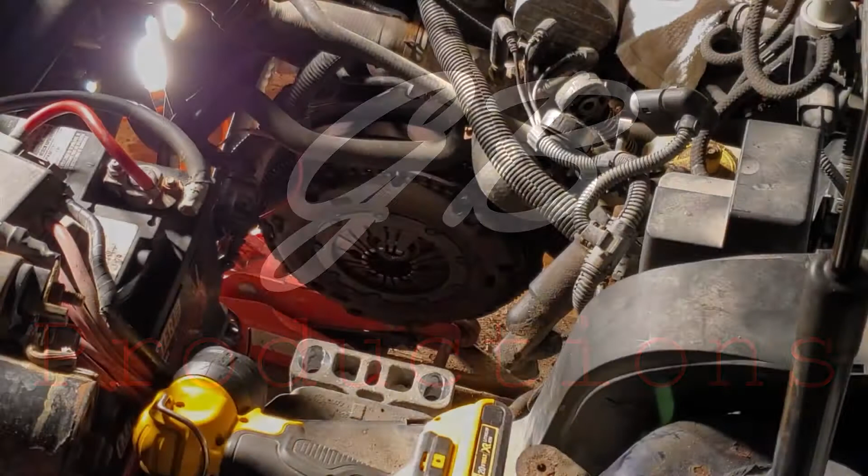Alright, so I think we are finally ready to try and fight this thing back in there. I greased the input shaft spline like the book says, and I put a little bit on the sliding surface of the release bearing as well.

So I've got a shop towel in the open passenger side output shaft flange because we can't put the actual drive flange back in until the transmission is back in the car. I think everything should be ready to go for us here.

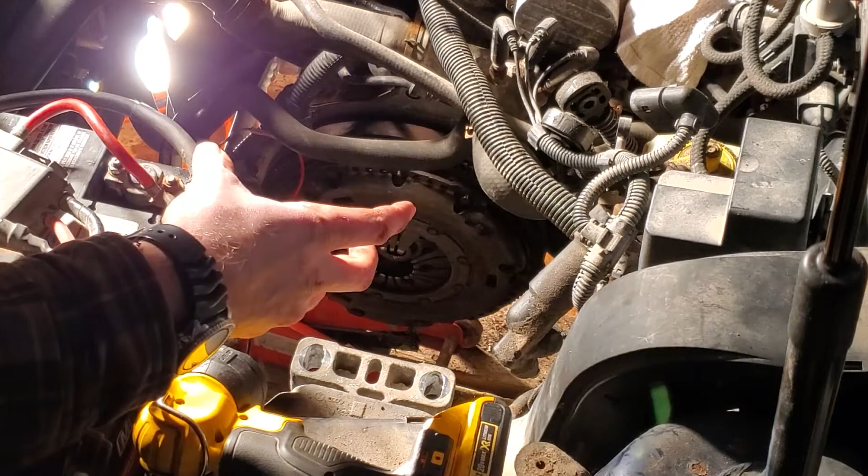According to my Euro shop guy, the reason I had trouble getting it out is because the transmission actually has to rotate back in the car, back and then up, and then rotate to get the differential past the flywheel and the subframe. He suggested having the engine as low as we can without pulling on any hoses, so that's what I'm going to do.

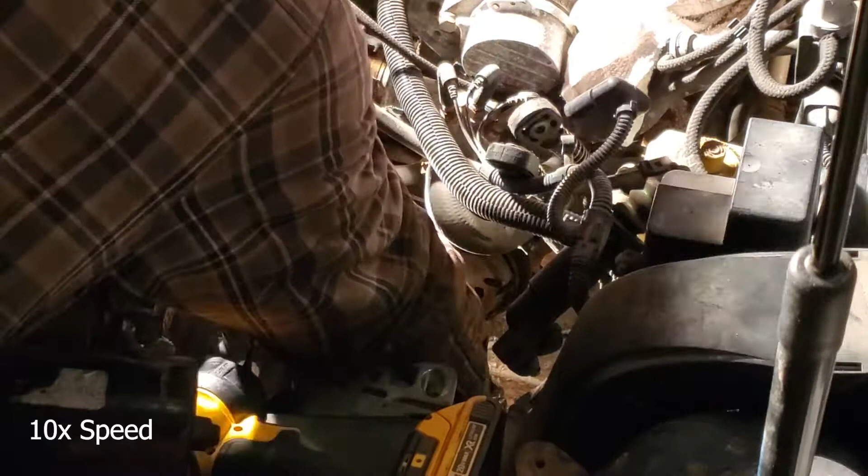Up in there as it falls off the jack, of course.

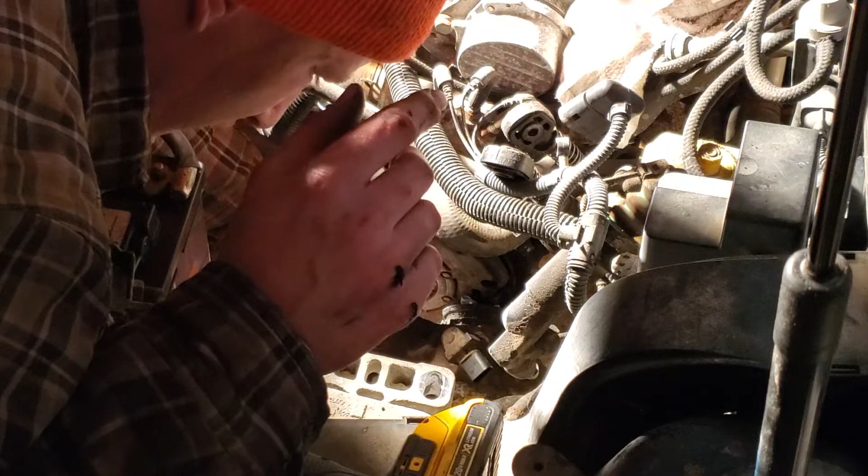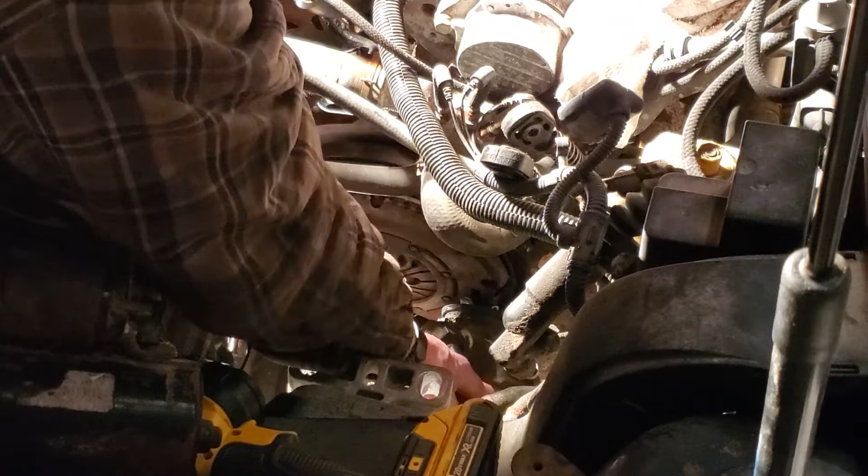Don't do that. Manhandle the transmission in? Why not? It's not gonna freaking stay there either. Maybe. Stay there for a minute. Probably not.

I know you guys can't see much, but there really isn't much to see right now except me struggling. But you should be able to see as it comes up through the hole there. Hopefully it's going to start to go here now.

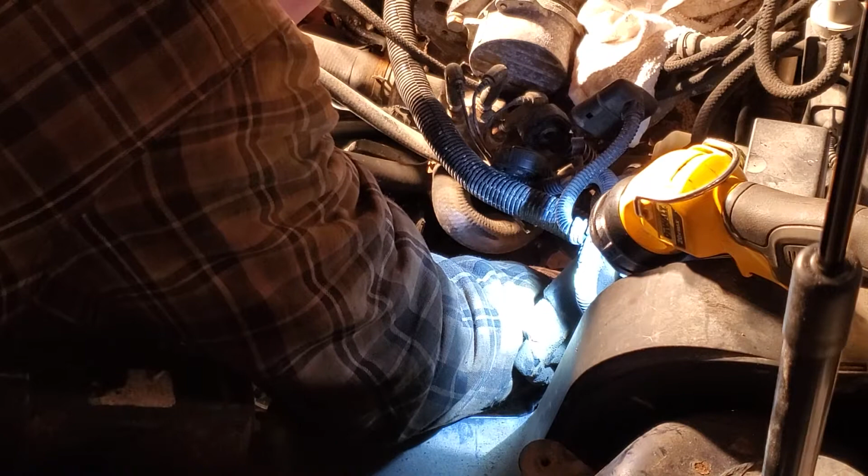I think we are in, more or less. Oh, aside from the power steering line being wedged up in there now. Probably going to cause a problem. I don't know if it fits past there once the transmission's in, so I'll probably figure that out.

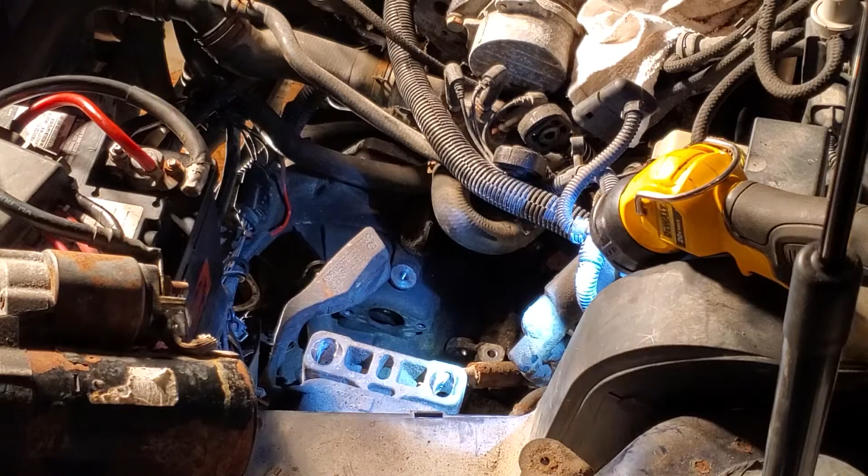Anyway, let's get the transmission closer to the engine now. I can do that without dumping it off.

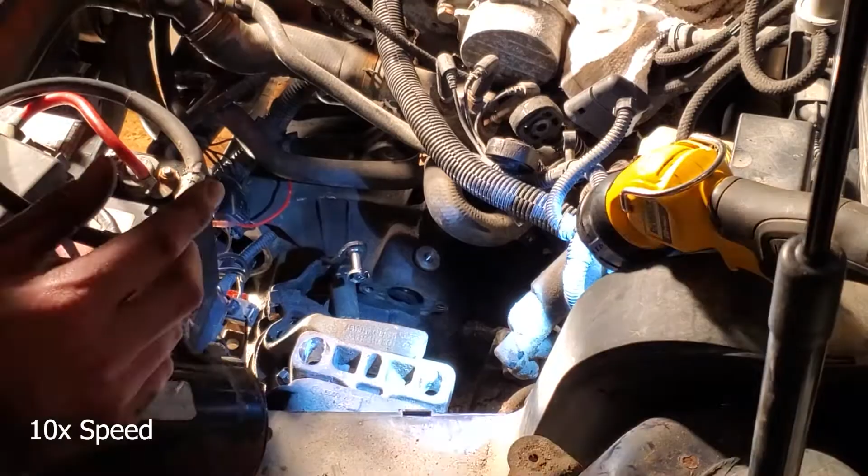Well, that's one bolt started. Man, what a mess. I think we got it. Finally.

Let's see if we can tighten those guys in gently and hopefully the rest of it moves with it. Can't remember what size they are. Get off me. This is supposed to be way up here.

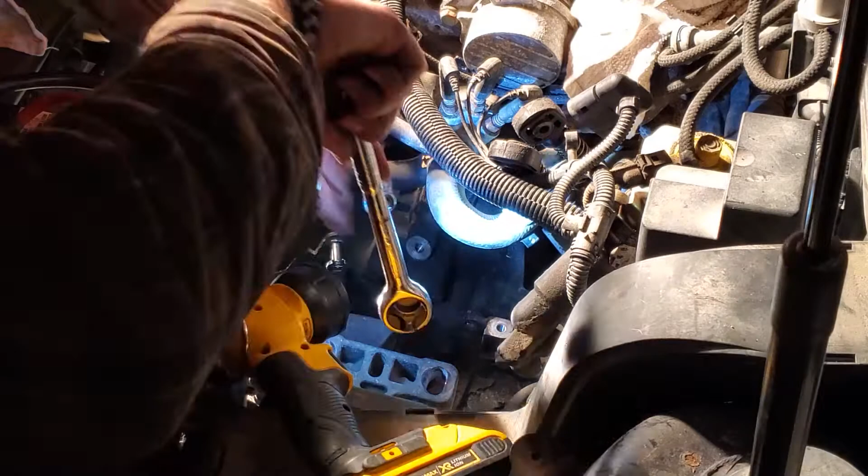Pain in the butt. Should be able to. Jack should be doing basically nothing now.

Don't do that. All right.

Okay, so it's in. Hopefully everything on the spline end of things is good. I don't think it would have gone together if it wasn't. If the spline pushes the clutch disc off center at all, there's no other hole big enough for it to go through, so I would say we're good on that front.

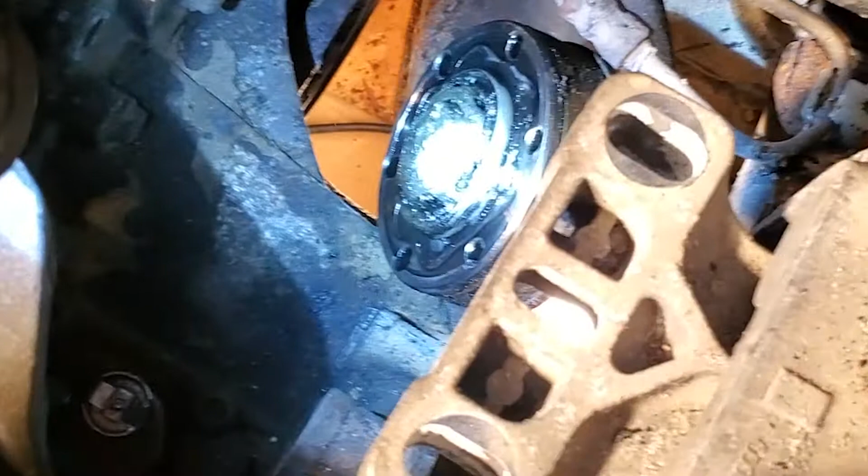So I'm just about to put together the driver's side CV axle here. The reason I'm doing this one now before I've got the rest of the transmission mounts completed is because the gasket that's supposed to be around the joint there that mates to the flange surface was missing. It's broken up inside when I took it apart. So what I'm going to do is I've cleaned the surfaces with a little bit of brake clean on a rag, and I'm just going to put a small bead of the black RTV around there as I put it together. I'm going to do that now as opposed to once the transmission is up in place, because I won't be able to access this flange like I have it right now.

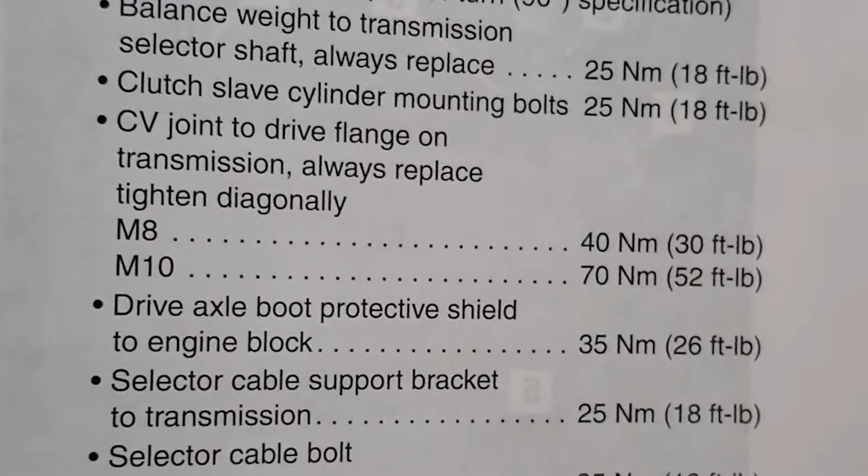And just while we're here, I figured I'd give you the torque spec for these CV axle bolts. They're M8 diameter on the shaft, on the threads, and for M8 it's 30 foot-pounds, and for M10, if we look at the book here, M8 are 30 foot-pounds and M10 are 52 foot-pounds. So I just took an 8mm wrench and put it around the shaft of the axle flange bolts, and the ones I have are M8.

So I'm going to do those to 30 foot-pounds after I put a bead of RTV on there, and then carry on with getting the transmission remounted, torque up the bellhousing bolts, get the mounts back on, and then I can do the passenger side CV axle as well.

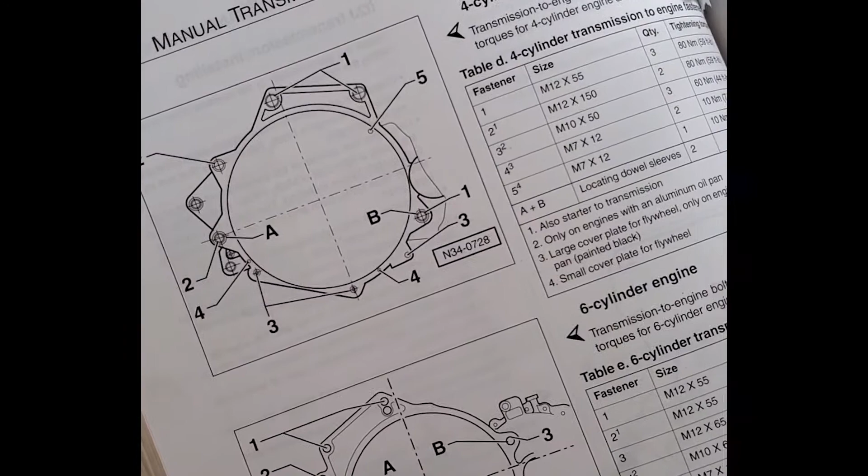So I'm ready to torque up the transmission to engine bolts now, and so we're looking at the 02J transmission. And of course, because they decided to do not only different sizes of bolts but into different materials, we have like 6 different torque values we have to do here, which just makes it more complicated than it needs to be. But anyway, I'm going to leave the starter ones out for now.

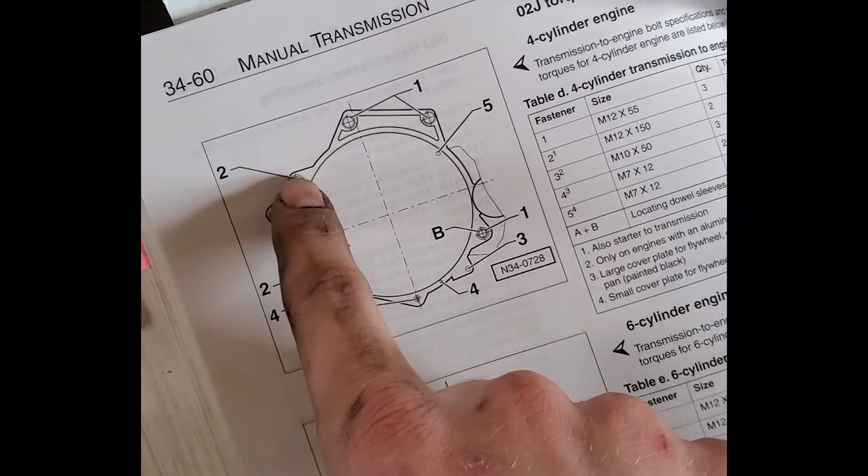That's the 2 number 2s on this side, because I'm not putting the starter in yet. I've got the 2 number 1s in the top in, I've got the 3 number 3s in the bottom in, and I've got the 1 additional number 1 towards the back of the block in as well.

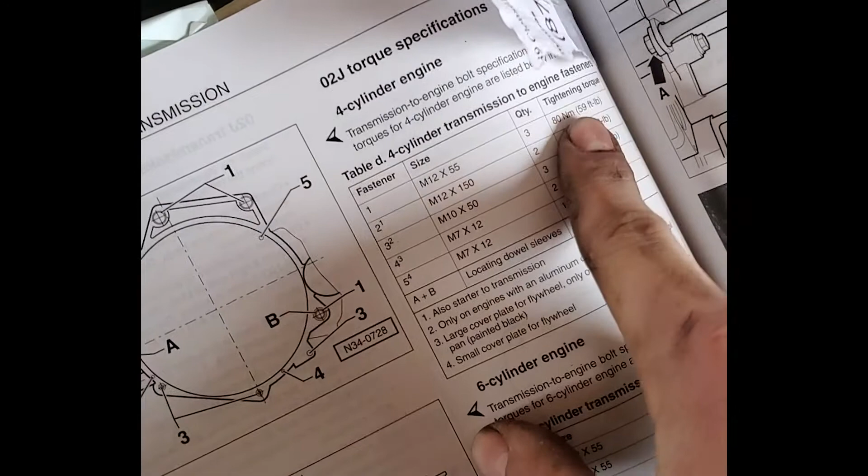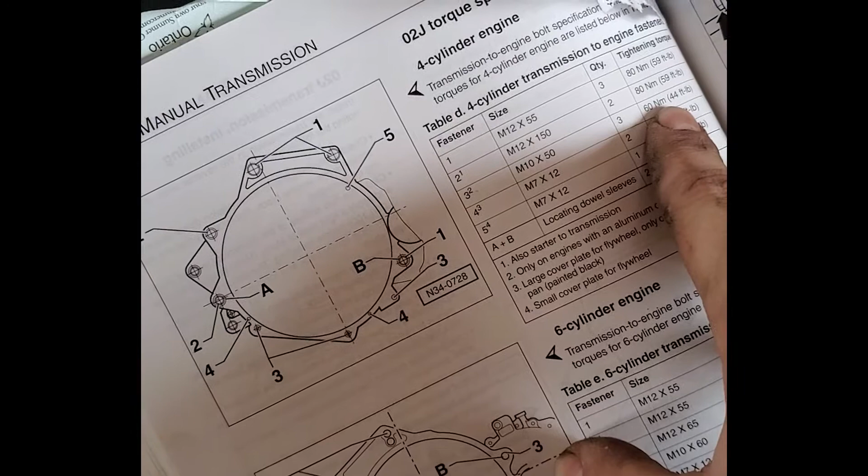So for number 1s, we're looking at 59 foot-pounds. That's the top 2, and this one here that comes through from the engine into the transmission. And then we're looking at number 3 - 1, 2, 3 number 3s here, which if we go across here are 44, because they're into aluminum. They're into the oil pan, which is aluminum, so they're a little lower, and they're a little smaller diameter. They're M10s instead of M12s.

So I think that's all the numbers I need for right now. 1, 2, 3 number 1s at 59, and 1, 2, 3 number 3s at 44. The number 2s are for the starter. We'll do a little later. They're 59 as well.

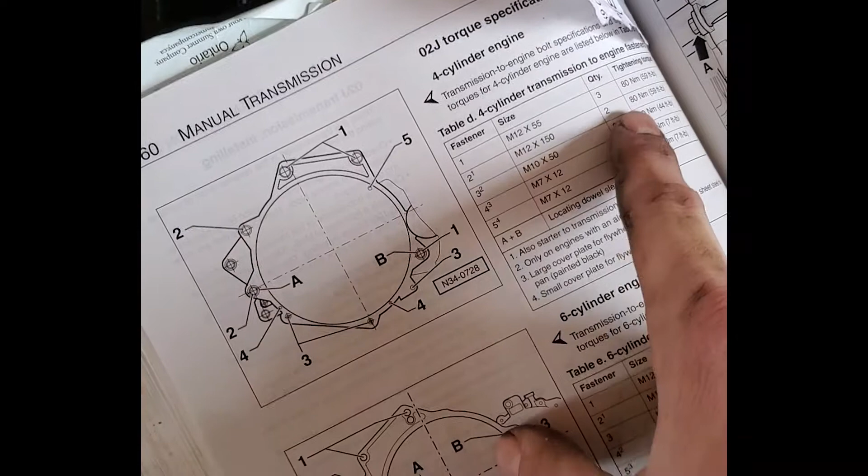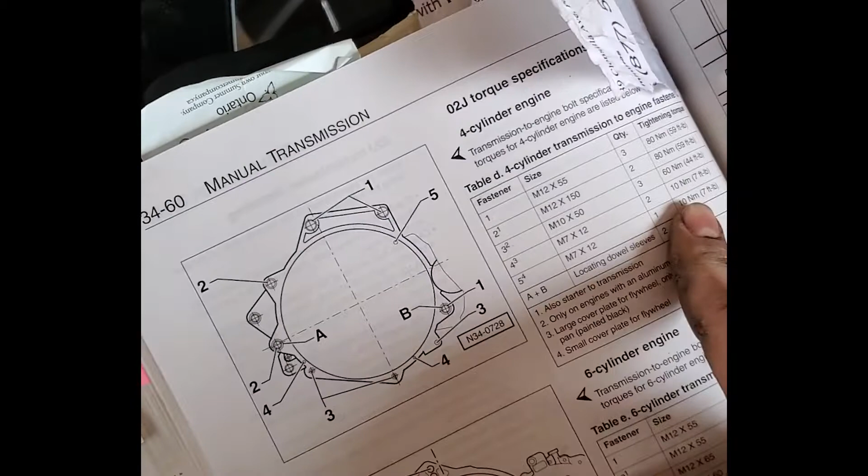The number 4s, I don't even know what those are, but I don't have them. Number 4s and number 5, I don't have those bolts. They weren't in there, so I don't know if they're missing or if it's something that mine doesn't have. But they're both 7 foot-pounds if I get to those, if I find them. I don't remember taking them out, so I'd say they're not there. But those are the 2 numbers we need, 59 for the big ones and 44 for the small ones.

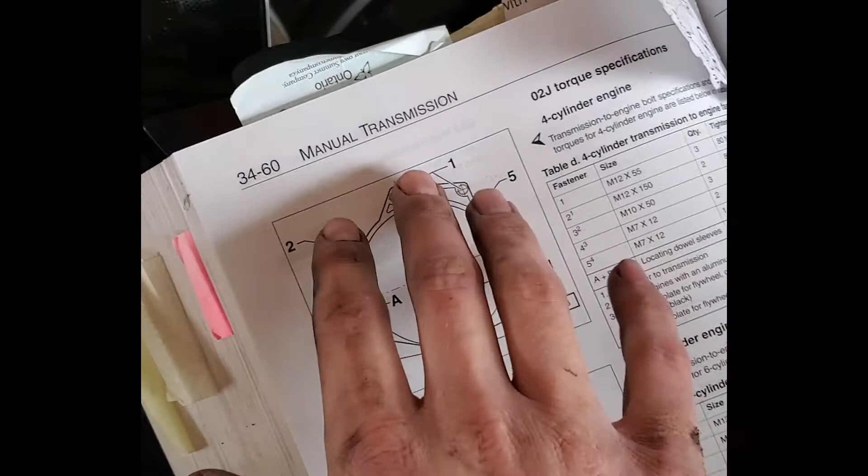So I'm going to go ahead and do those. It says to do it in kind of a star pattern, just like you would do any flange or hub. I'm going to do my best. It's kind of hard when you got to go from below the car to above the car and back and forth, but I will step them up in increments. So we're going to do that and then carry on with the engine mounts.

So I'm going to just do these torquings in increments like I normally do. We got to do 3 of the big ones at 59 and 3 of the smaller ones at 44. So I'll do probably 20 on all of them, and then I'll do 44 on all of them, and then I'll do 59 on the 3 big ones.

Alright, that's the transmission torqued to the engine.

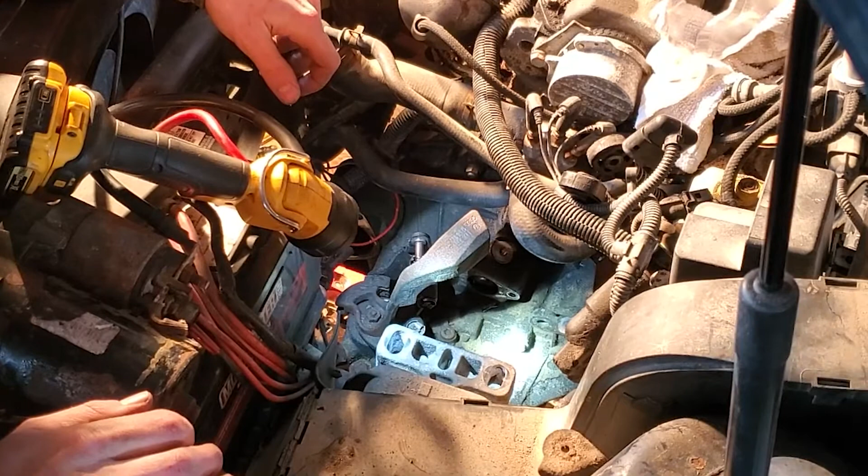Now we can put back together this transmission side mount. Got the bracket here. And the bolts.

The manual says for those 3 bolts that hold the actual mount bracket to the transmission, it's supposed to be 37 foot-pounds plus a quarter turn. Well, the plus a quarter turn is the stretch factor, and that's for new bolts. It says you're supposed to replace those bolts every time you have them out so you can do that quarter turn stretch. Because these are used, I'm not going to do the quarter turn.

I'm going to do 37 and then I might go to 40 or 45. I'll have to see what it feels like. 37 is tons, they're never going to come apart at that. But if you overstretch them, there's a risk of them breaking while in service, and then your transmission is loose on the engine mount. So I'm going to work those up to 37, and depending on how they feel, I might go higher, I might not, but we'll try that much and see what it looks like.

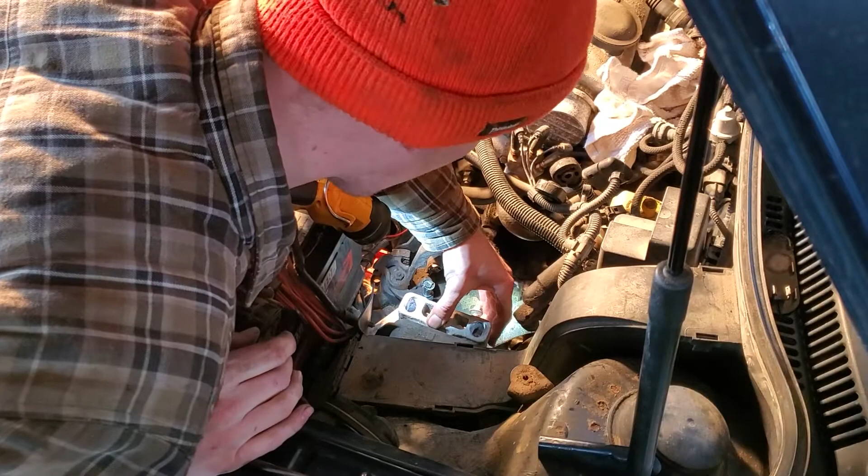It should go pretty much right up and in line with where it's supposed to go, more or less. All you want to try and do when putting the bolts in is to not have the bolts pulling up on the transmission as you're tightening them until like the last quarter of an inch, or you risk damaging the threads in the mount.

So I've got it up so that it's basically all the way to the top already. There's a small gap, less than a quarter of an inch, between the bracket on the transmission and the mount on the car. And I'm going to anti-seize these big bolts here.

They're pretty high, like 74 foot-pounds of torque, I believe. I'm going to double check that in a second. But they're pretty high torque for what they are. In this case, I'm going to put some anti-seize on the head, because that will help if the bolt does have to pull the transmission up a little bit - it'll be slippery on the bracket then, at least, instead of trying to grab it.

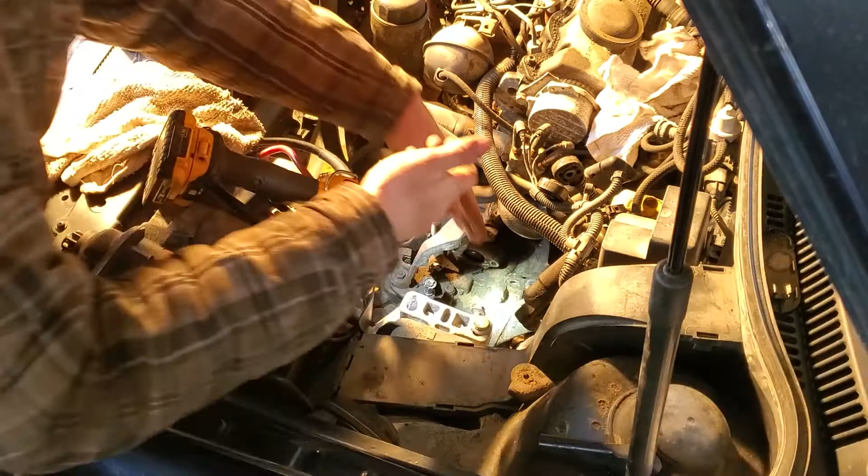And I was able to thread that in all the way by hand, which is what you should be able to do. You shouldn't have to use tools. If you have to use even a ratchet, you probably need to look at cleaning the threads on the bolt or in the mount before you put it together.

But yeah, you should be able to thread most fasteners in by hand with just fingers, no tools. If you can't, you should probably clean them, and you can usually tell by looking at it when you've got it out whether it's clean. Like these bolts look like brand new from the factory, they've still got the green coating on them.

But the anti-seize not only helps with protecting that green coating from salt and corrosion, but it guarantees that you can get it out the next time easily with hand tools. You don't even have to use an impact gun or anything. Crack it loose, and as long as you've got the transmission supported, you should be able to wind them out just like I wound them in with my fingers.

So I'm just going to double check here. I believe it's 74 foot-pounds for the big bolts.

74 foot-pounds for those big ones I just put in. And the little diagonal support bracket that we took off when we were pulling it apart, that one and the nut and bolt are 18 foot-pounds. So I need 18 for these.

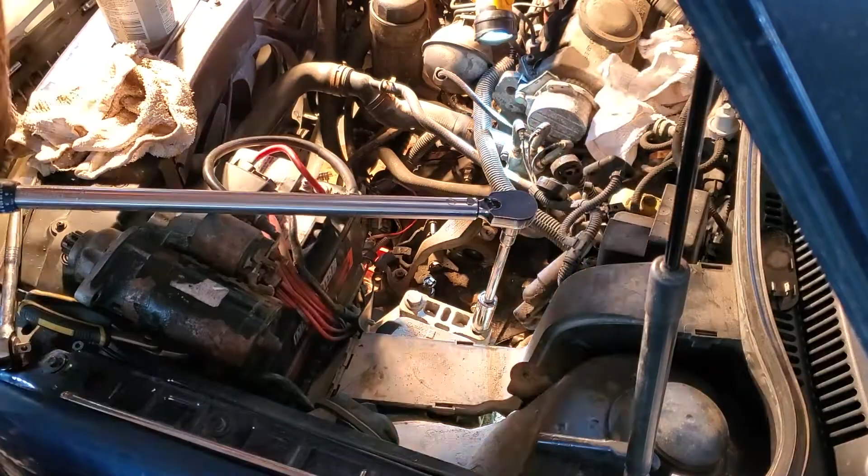I'm going to use my big torque wrench. Doesn't go as low on the scale, but I trust it more. It starts at 20, but we're going for 74, so it should be okay. Flashlight's in the way. Anti-seize I'm going to end up with all over my sleeve.

Now I am noticing right away that the bolts aren't in the same place on the bracket. So I'm wondering if I should back these off just a little bit so that they'll move, and then I'll lower the jack from under the oil pan, and hopefully that will sit where it's supposed to sit.

I'm not going to take it away entirely because I don't want the bolts doing a lot of work until they're tight.

It should come out pretty much the same. Oh, battery, don't do that. That's why they tell you to take the battery out.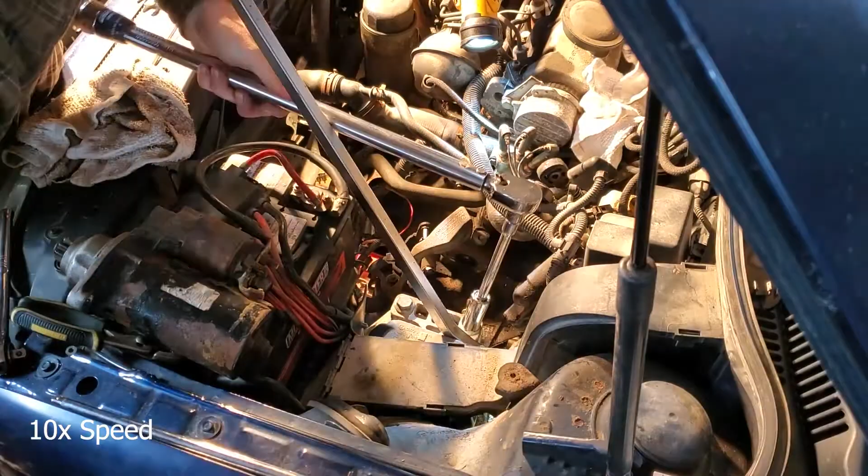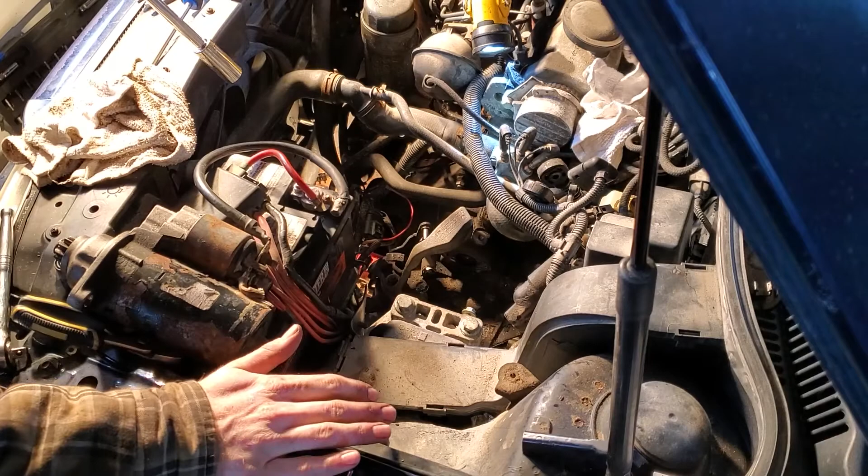Alright, so that's the transmission side mount done, other than the support bar there, which I'm not going to do until we get the clutch slave cylinder back in there, so that it's not interfering with us when we're trying to do that.

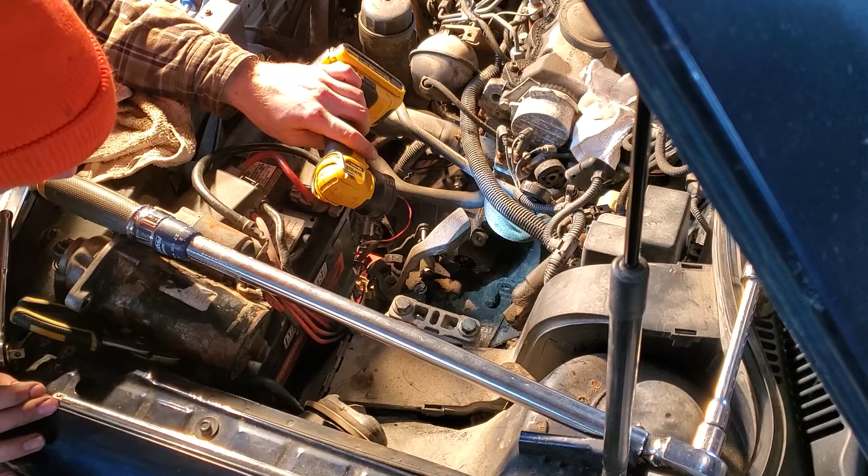Wheel speed sensor I can actually plug in here right now. I wish I had brought my dielectric grease, but these plugs are pretty good. They're sealed, rubber seal from water, so they're pretty good that way.

If you do pull one apart and you notice that there's any kind of corrosion in it, then you should definitely take a little bit of time, clean it out, and then make sure you put some kind of electrical contact grease, dielectric grease on it, so that it'll insulate the connections and also keep dirt and water out of it.

So I'm going to go down and do the passenger side CV axle and the pendulum mount and the passenger side CV boot shield, and then we'll come back up here and put the starter in, put the slave cylinder in, put the shifter linkage or shifter cable bracket back on and hook up the cables, and put that support bar back in, and then we'll be left with the airbox, which is just one bolt.

It's supposed to have two, but it just has one right now. And then I think what I'm going to do as well while we're here in the shop is the vacuum pump O-ring seal, which is what I initially thought was the oil leak I was dealing with. You can't see it on camera, but there's quite a bit of oil sludge underneath, like it's been slowly leaking.